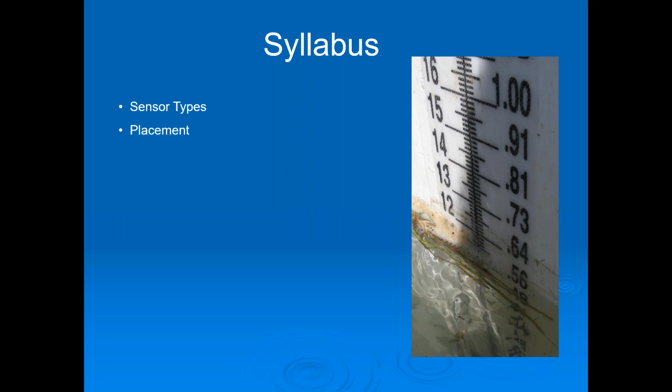Sensor types for collecting stage data, and placement. Really, that's it. It's going to be pretty simple. And we're going to just dive right in now to sensor types.

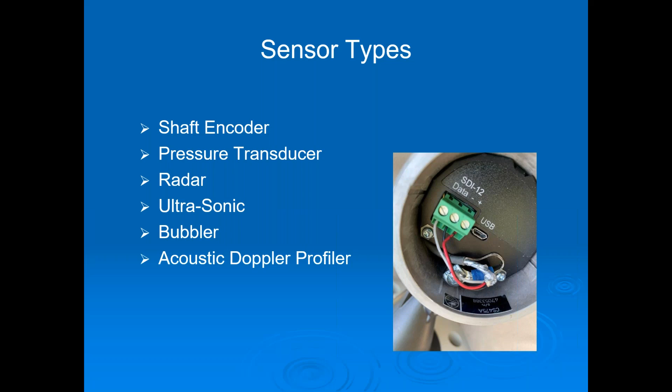We'll look at a few of the most common ones, including shaft encoders, pressure transducers, radar, ultrasonic bubblers, and acoustic Doppler profilers. I've got experience with some of these, but not all of them. So I'll admit where I have little experience, and I'll share the experiences I have with the more common types of sensors that are in use out there.

Shaft encoders are simple. We'll start there. These are the oldest type that we've used. In the old days, they weren't digital. They had chart recorders with pen and ink and a paper chart. Nowadays, they're digital. They're even SDI-12 type sensors. They're very simple in concept.

There's a shaft that's turned by a pulley here. When the float goes up, because the water level goes up, the weight pulls the chain down the other side. It turns the shaft. The shaft is connected basically to a magnet arm with a bunch of Zener diodes, sometimes the older ones. I don't know how the newer solid state ones are, maybe the same. And it lets you know that the position of the shaft has changed. So very simple digital type sensor.

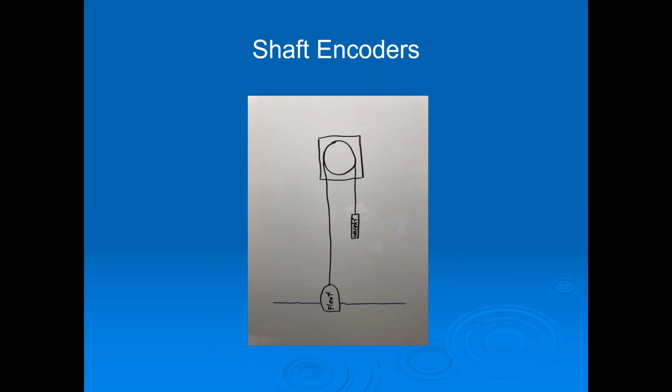So some advantages and disadvantages of shaft encoders. They're still handy. We use a few of them, not many, in all the sites that we take care of for our clients. They're considered a contact sensor, so something is in contact with the water to measure the water - that's the general category type of sensor. They're relatively inexpensive and sturdy. There's not a lot to go wrong on these. I think we've only broken one over many years, and it just quit. They're digital, obviously, and they do have SDI-12 options available now too.

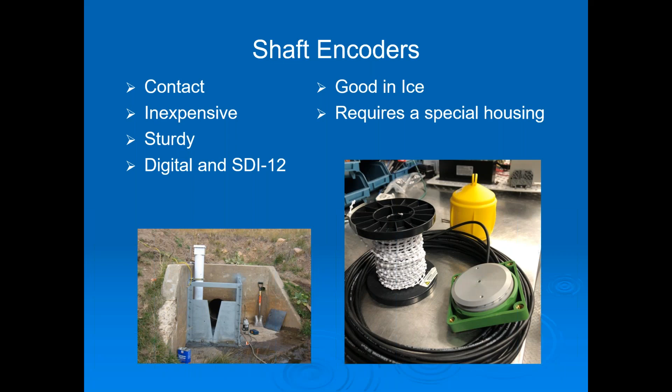Now, further on, I'll show lots of photos of just examples of one, but shaft encoder I won't really cover any more than this. So this is an example of a small site that uses a shaft encoder that still works really nice and reliably.

Pressure transducers are probably the most common sensors out there for flood warning types like us. There's two types of pressure transducers, the vented and the non-vented types. I remember using my first pressure transducer, maybe it was like 1990 or something, when they first came out. We thought they were amazing.

It was housed in a 4-inch piece of PVC pipe about 1 foot long, and is real bulky, and the signal conditioning was inside of it. So if you wanted to calibrate the span and zero pots, you had to take it apart. But we thought they were great, and they last like almost a year.

Nowadays, pressure transducers are quite sturdy. They last a long time. They're a good, relatively inexpensive option. And basically they do just what the name implies - they measure the pressure of the weight of the water on top of them.

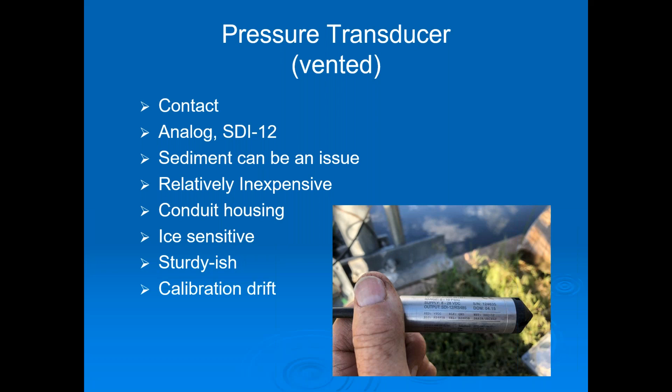So we'll come back to PTs later. There are non-vented PTs. The previous one was a vented PT, which is what we use because you can do telemetry. We have a client that likes to use these unvented PTs because they're just doing data collection. They don't care about flood warning. But I thought I'd include them anyway because you'll see them out there.

The big advantage is they're super simple to install. You don't have conduit running from a channel bottom up to your telemetry station up the hill or over on the side of a bridge or whatever. They just need a little short section of pipe bolted with a couple bolts into a rock or somehow hooked to a post or whatever.

They're a little more expensive than a vented pressure transducer. They have internal logging, internal power, so obviously you've got to do your maintenance on it, change the batteries out. You have to manually download the log, all that. Not helpful for flood warning, but good if you're just trying to inexpensively collect some data.

So won't spend much time on those. I don't care for them. You have to do post-processing too.

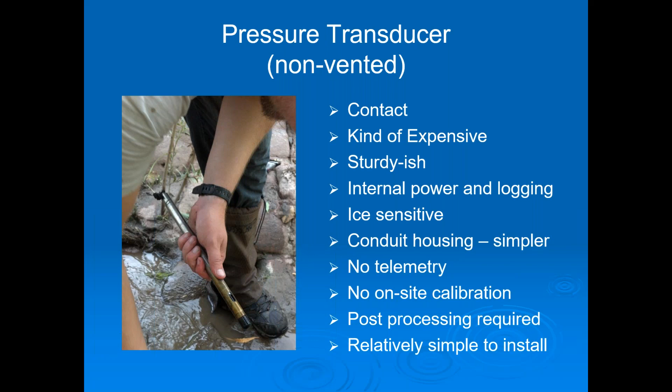You have a barometer nearby hung in a tree somewhere. After you take the log data off, you have to post-process to separate the atmospheric pressure changes from the water pressure changes. A vented pressure transducer is vented to the atmosphere, so it passively discounts any atmospheric pressure changes. So you're only measuring the depth, the weight of the water on top of it, and not the weight of the atmosphere on top of the water. Hopefully that makes some sense.

Radar, these are becoming more and more popular. We're using a lot more radar now. We really like the radars. They're really handy if you have an overhead place you can mount the sensor. The basic concept is they use the radar range of the radio spectrum, high frequency electromagnetic radiation, to measure from the unit down to the water, and it gets a return back, measuring the time it takes to travel down to the water and back. Because they're super high frequency, they're not thrown off much by temperature changes of the air and that kind of thing. That's the basic idea behind them.

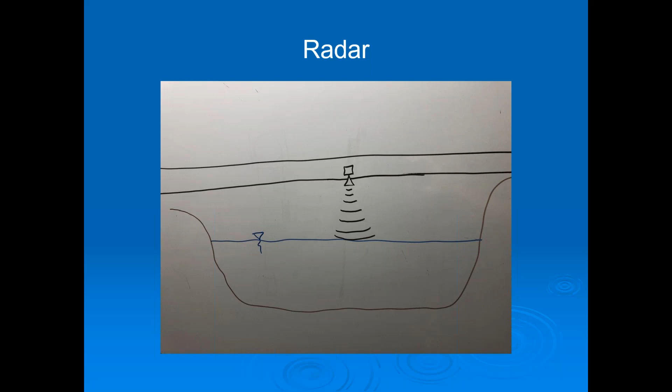So radars are non-contact sensors. They're about your best option out there for keeping a sensor out of the water, out of the mud, out of the environment that would harm it.

You know, there are older ones that are analog. We just use the SDI-12s now because they're easier to work with, and they're lower power than the analogs.

A nifty thing about the radars that a geomorphologist company like ours would appreciate is that it tracks channel invert between flow events. A flow event usually means the channel was dry, then a big flow comes through, and then it's dry again. So from dry to dry, we often have channel elevation changes, and the radar will pick that up. It'll let us know what the elevation was before the flow and after. So if we're seeing any trends in aggradation or degradation, that's a bonus bit of information we get with these non-contact type sensors.

So they are relatively more expensive than a pressure transducer, but they tend to be easier to install and maintain, so you save a little on your labor cost, depending on the layout of your site.

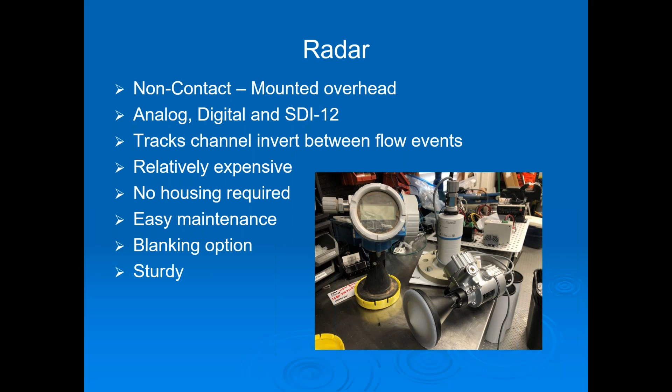They're sturdy too, but we do put them inside of housings, and I'll show you a couple examples later.

Ultrasonics - we thankfully don't use these anymore. Probably 15 years ago, they were a decent option for non-contact. The radars weren't quite out yet, they were in their infancy. The ultrasonics use sound waves to do the same job as a radar, to measure the time it takes to get down to the water and back, to measure your distance.

Because they are in the sound spectrum rather than the radio range, you can actually hear them chirp like a bat. They're real susceptible to temperature changes, and even with their internal temperature compensation, they had a hard time giving the feedback the sensor needed to tell how hot the air was, so it could adjust its algorithms for calculating the distance. Some of that is just the sensor in Arizona would get so hot, even in the shade, they just heat up. And so we didn't have great luck, and they died after 2 or 3 years anyway. So they just weren't robust.

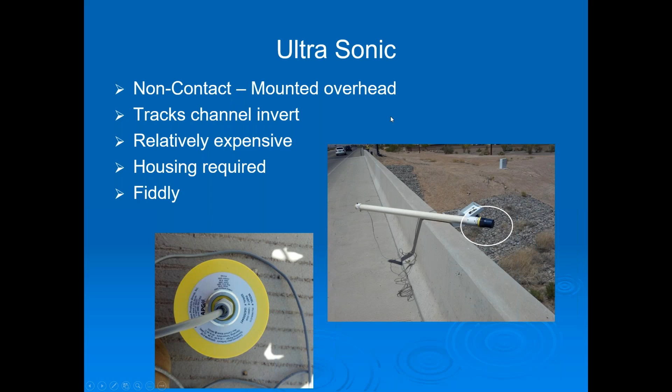So I call them kind of fiddly, and I wouldn't recommend them for flood warning, especially if you have a long distance to measure, like 30, 40, 50 feet. I think some agencies still use them in real precision measurements that are in a controlled environment, but they're not the greatest for us.

Moving on to bubblers. Bubblers are great. They've been around a while. They're very accurate.

The basic principle is, there's a gas or air source up in the housing where your gauge and equipment is. There's compressed gas, one way or another. It's forced out at a constant flow rate through a small tube, an orifice, down into the water. The deeper the water, the more pressure it takes to force the air out at the same flow rate. So as the water goes up, more pressure is needed to force that air bubble out. So they call them bubblers.

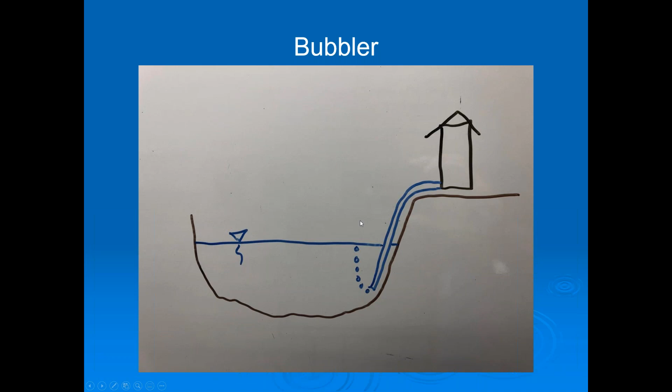Nowadays, they're more compact. They use less power. They can fit in smaller areas. They're still considered kind of bulky, but they have arrived, and they are useful now for flood warning. And they aren't just for the USGS doing high precision stuff - they're for us doing flood warning also.

I say it's mostly a non-contact sensor. All the stuff that matters, the expensive stuff, is up here out of the way, and it's out of the flood zone, hopefully. The only thing that's in the water is that very inexpensive pipe, or line, polyvinyl line of some kind.

They have everywhere from analog to SDI-12 options, and obviously SDI-12 is always the best alternative. They're more expensive, so that's kept a lot of our clients out of the market for them, along with their bulk, and they need a lot more power typically.

All that is improving though, so you should keep your eye on this and watch. Pima County's got one on a flood warning site, and they're having great results over the last few years. I think Lynn said they only had the line clog one time through kind of a fluke event, but basically these things keep the lines unclogged through a purging routine that you can time, have it do it every 5 minutes or something, where it supplies a higher rate of gas for a short burst through the line to just keep it cleared out.

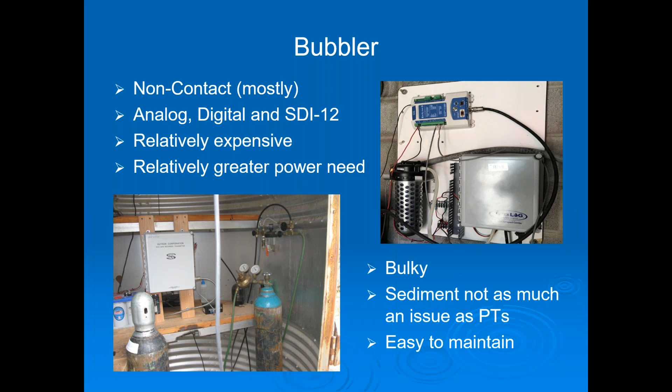So they're well thought through, they're becoming very reliable, and the cost is coming down too. So they're down in our range for sure, and they give you good, accurate results.

Acoustic - so we haven't used bubblers yet. Acoustic Doppler profilers, haven't used those either. They are one of those more expensive, more power hungry, bulkier options. I don't even have a nifty drawing for you - you guys are probably disappointed you didn't see my drawing.

The idea is that they profile the current, or the actual velocity. They can give you a velocity profile from the bottom of the channel or pipe up through the top. Instead of, like most stage gauges where we just get a depth and then apply theoretical calculations to determine velocity and discharge, these actually measure the velocity at different levels throughout the profile, and they also keep track of the channel geometry. There are some that look up from the bottom of the channel, and there are some that emanate the energy from the side of the channel and can measure very large bodies of moving water highly accurately, and even keep track of where the bottom of the channel is, say if it's subject to erosion during high flows or anything. So there's lateral and bottom mount options.

They can work underneath the ice just fine. They're really good for certain types of applications. For our typical flood warning stuff in dry, desert environments where the wash is dry most of the time, we still probably wouldn't look at an option like this. I'd look at it for maybe a big river or something where there's water in it all the time.

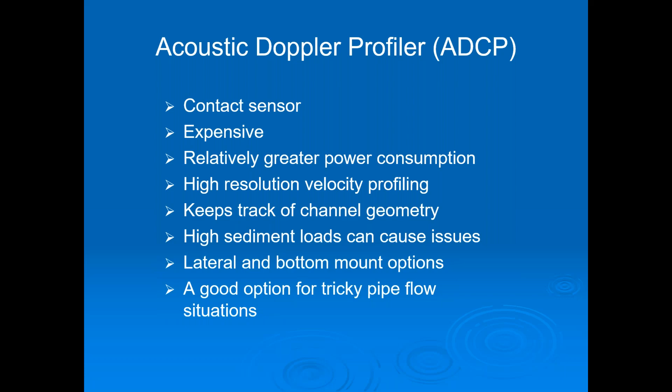So now we've covered most of the types of sensors that are out there that are in range of flood warning types like us. So we'll talk a little bit now about some open channel hydraulic concepts. I'm not going to have any equations here, just some ideas and concepts that we should keep in mind while we're looking for a place to put a sensor.

I'm assuming that you've already decided, hey, we need a sensor on this bridge or in this reach because this is really important to the community downstream. Or we've run a little bit of modeling, and this is where the model says would be the best place for us to put a sensor. That's where we start - I'm assuming you already have your place picked out. That would be a whole other talk, to talk about where to place the actual station.

Now we're just talking about, now that you've picked your site, where do you put your sensor? How do you decide what type of sensor, all that kind of thing. Then we'll just talk through some examples instead of everything we know about it - we'll just look at some photos. I like pictures, so pictures are fun.

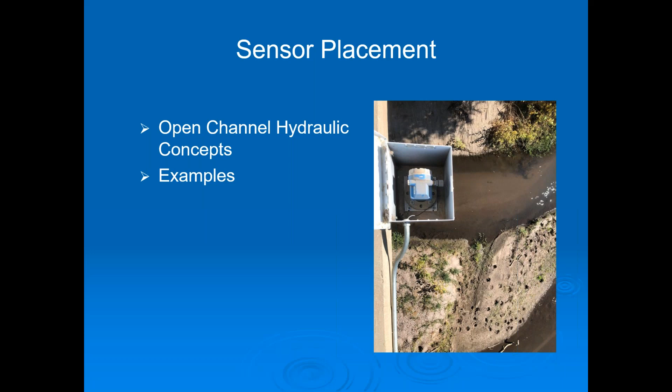Here's an open channel hydraulic consideration. The name of this talk is Collecting Stage Data. Stage is different than the depth of the water, by the way, and I wanted to make sure there's that clear distinction. In this little illustration here, another one of my great works, say this is a dam, or it could be a weir or any structure, and there's a ponded area in front of it.

We're looking crossways to it. Say on the left is an emergency spillway, and we've got our pressure transducer down here at some elevation. We don't even know what it is, but we've surveyed and we know that it is 5 feet below the brink of the emergency spillway.

In this example, this sensor, say it's a pressure transducer, is going to tell us that the depth of water over the sensor is probably around 6 feet. It's about 6 feet of water. That doesn't tell anybody anything really, because we don't really know where the PT is in relationship to the top of the dam and all that.

But with a simple survey, we do know. We know that this sensor is 5 feet below the brink of the emergency spillway. That brink is a really important thing in dam safety. That's what everybody's really concerned about, that and the top of the dam. Those are important elevations.

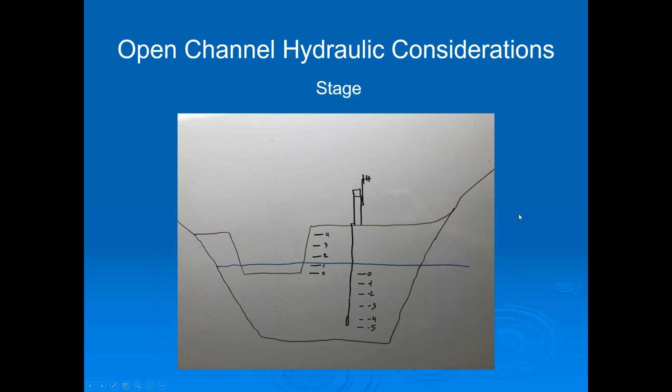But stage, there's stage for you. Stage is not depth necessarily. Hopefully that's clear, hopefully that's helpful. I had somebody ask about stage one time, and I was kind of like, how do I explain this? Didn't have a great drawing.

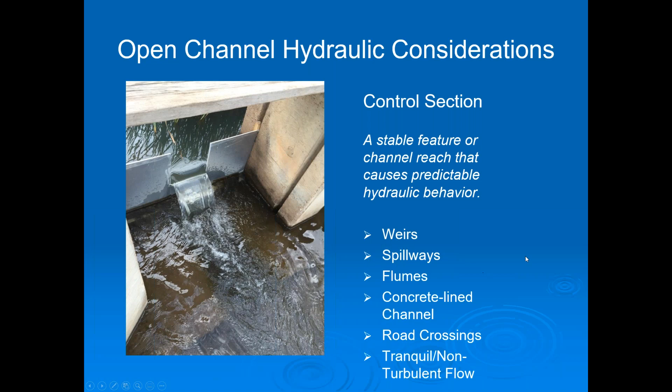Technically, it's where your forces of momentum are roughly balanced or less than the forces of gravity. That's as technical as we'll get, but you can all have a feel for that since you've been out in water. What's downstream controls things more than what's upstream of the sensor. Hopefully I didn't just totally confuse everybody with that - we can always circle back on that later.

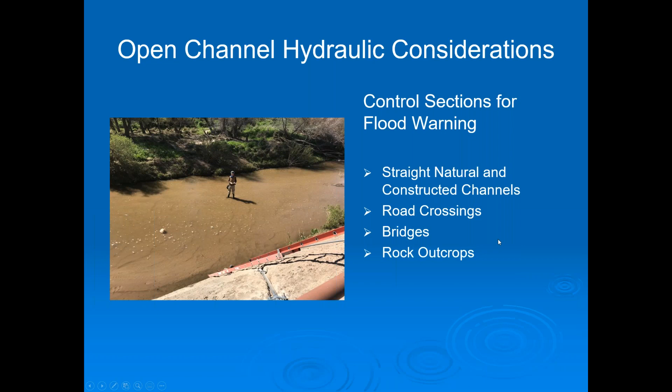We want it to be a stable structure that won't change shape while the flow rises. If the shape changes as the flow rises, we lose track of what the actual magnitude of flow is, and then we can't really warn downstream, hey, here's what's coming. We don't know because the channels change too much. So we look for things like rock outcrops, bridges, road crossings, that kind of thing for our control section for flood warning.

We remind ourselves all the time that this is for flood warning - we're not trying to measure every drop. If we were, we'd be using weirs and things like that, which aren't really useful in large channels. And weir equations don't go up very large anyway. They're not meant for that.

Speaking of bridges, bridges are great places to put gauges because they're accessible. Usually the channel necks down at the bridge because they've had to grade the bridge approaches in tight to minimize the length of the bridge. So you've got water squeezing through a point where you can put a radar, a bubbler, a pressure transducer, or whatever you have.

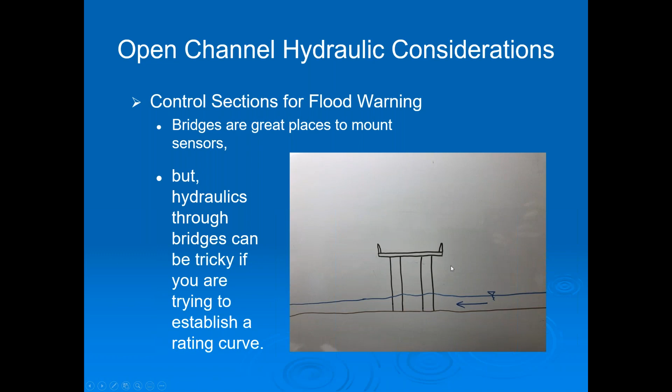But hydraulics through bridges can be tricky if you're trying to establish a rating curve. In flood warning, we're not trying to get a rating curve that's super accurate. We want to know, is it 100 CFS? Is it 500? Is it 10,000? Is it a million? We want to know a relative magnitude. So bridges are fine, but hydraulics are tricky through bridges anyway - you're not going to get super high accurate measurements at bridge locations, but they're great places to mount sensors.

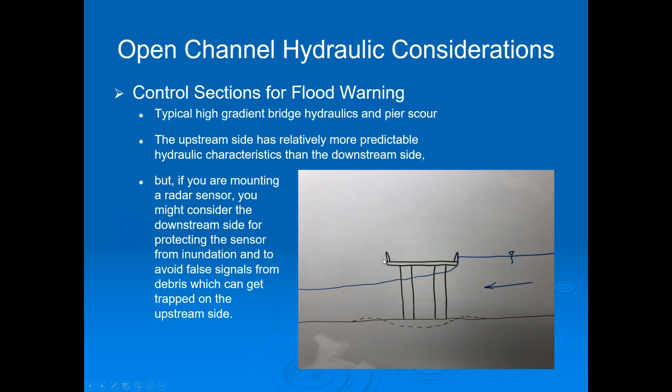You don't have as good a rating, but the sensor will survive, and that's kind of what we want. We want the sensor to survive the floods so we can warn people.

So this is just another thing to show what happens to the bed, how the bed deforms during these big flow events. That's another thing that's going to impact your rating curve.

I promise not to talk about rating curves too much, but that's a whole other talk. Rating curves are great. They help you transmit information to downstream people better, like actual magnitude and what it could do to them, as opposed to only knowing stage at a location. We've done that talk before, we can do it another time.

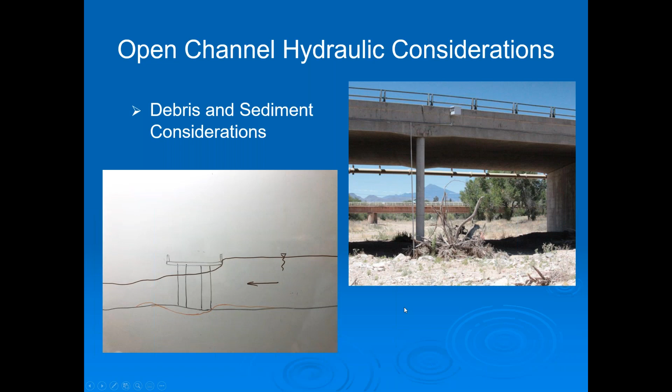We were trying to get the low flow channel, which was right up against the pier. We decided, let's play it safe, put it in the mid span. We're not on the very bottom of the channel, but we're close enough - this is flood warning, so let's not worry about it. So it just goes to show, you learn a lot over time, and you got to pay attention.

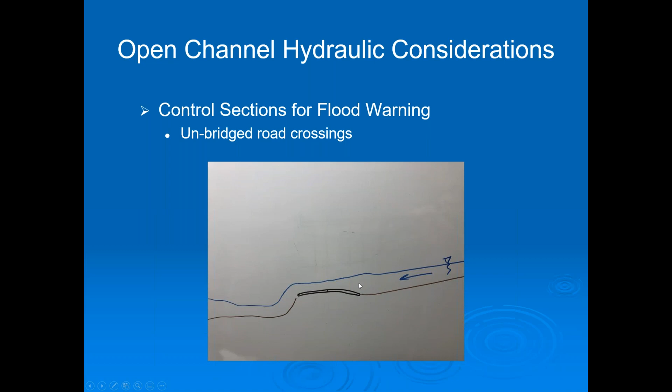So we're going to keep moving here. Some of the goals of sensor placement are, obviously, limiting damage to the sensor itself.

We actually put some equipment in it too after they abandoned it, used it for a couple of years until it blew out, and then we put something new in later. So you do what you can, but we do try to keep an eye on potential damage to the site so that it keeps running during the flood and helping give us good information.

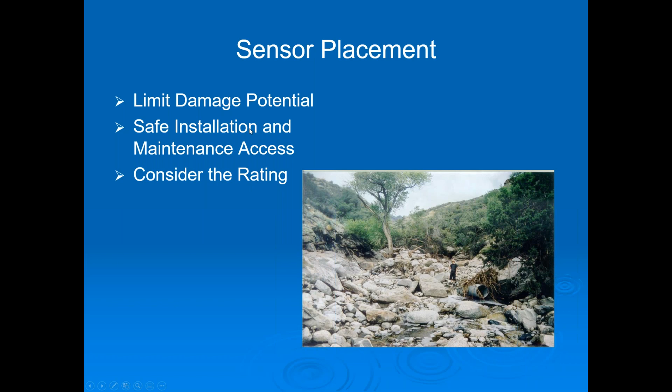The other thing we need to really pay close attention to, set aside the rating curves - we need a safe place to put that sensor so we can install and maintain it. We consider the rating curve after that. Mostly we need it to run right and give us good data.

So, sensor placement. Let's start with natural environments. Most of the stuff we do is in natural environments. Most of our clients are smaller rural communities that don't have any staff to do this, so we're out there in the hinterlands installing and maintaining these things.

We tend to avoid placing conduit in overbank areas where there's lots of sediment moving over time. Instead, we look for rock outcrops, obviously. A lot of this goes without saying - it's probably rudimentary for some of you, but I figured we need to at least cover the rudimentary stuff too, and we'll hopefully have some better tips later.

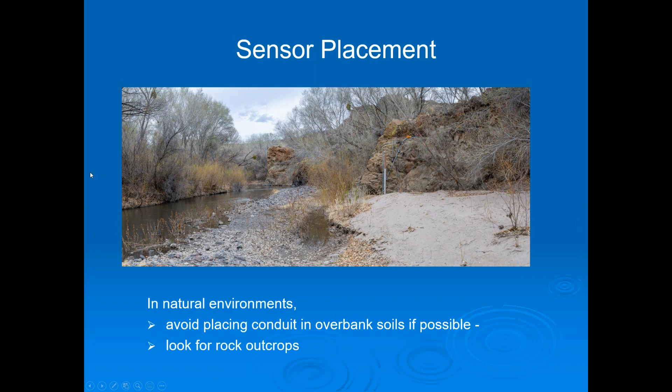So we look for rock outcrops. This is also a place that squeezes the water over. It's a pretty stable channel situation because of the outcrop, and the channel isn't going to move laterally on us because this is actually a fairly big, deep canyon, and there's rock outcrops on the other side. So we've got a nice pinch point to put things.

For pressure transducers and bubbler lines in high energy environments, we've learned the art of armoring things well. We tend to use, down in the low flow channel areas, 1.5 inch IMC - that's intermediate metal conduit or rigid conduit, as some of you might know it. We use that a lot and nail it down really good, because you can see from the size of the cobbles in this stream that this is a high energy environment. This isn't a nice sandy bed environment with low flows, low velocities under 10 feet per second.

This is 20, 30 feet per second, moving big cobbles all the time. So we've learned in most of the rough areas we work, to really armor these things well. We use galvanized tower clamps - the same clamps you use to put antennas on towers and to mount standoffs. These are excellent for mounting conduit to rock and concrete. Highly recommend it. Don't use the thin straps you get at Home Depot - those just won't do, and they rust really bad too.

And we use 3/8 or 1/2 inch concrete anchors, and we've got a few hammer drills, so invest in a good hammer drill - it's worth it. We never use flex conduit. Yeah, it's easy and everything, but you'll kill yourself trying to maintain it in the future. It'll blow out on you, and it's hard to push cable through flex, so we just don't use it. It's not strong enough for what we do.

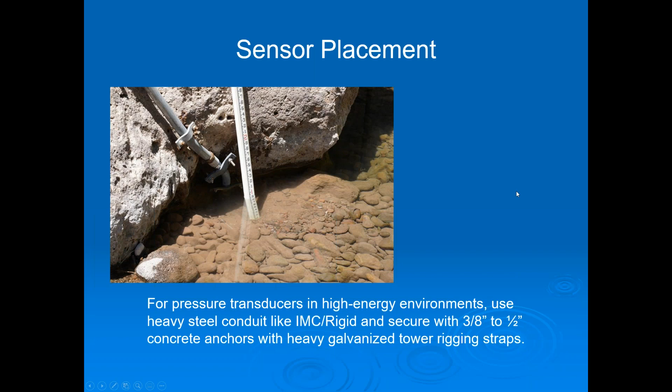Here's a couple more examples of typical installations. This is a cliff in the Gila River. We put conduit bodies all over the place for access. The rule of thumb is if you can't pull a cable through 2 90s in a row - if you've got a 90 sweep or bend, you're gonna have to put a conduit body in before you get to the next 90, or you're gonna really struggle over the years if you ever have to change out a pressure transducer.

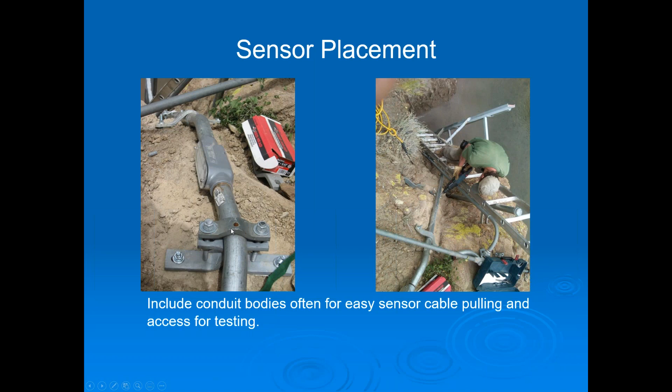This is about a 150-foot run, way up about 50 feet up a cliff, and it's a difficult site. We spent days putting this all in, but recently Tyler and I had to replace the PT, and it didn't take us more than an hour because we had conduit bodies all over the place to aid in that. So don't spare the conduit bodies, and use really big anchors and heavy stuff. This has been in for years now, and there's no rust or anything on it. It does just fine.

Just a little note, I was pulling in a lot of random notes and things, but tips and tricks from the years.

If you're working on a structural steel bridge, you shouldn't drill into the structural steel. That's a no-no, not because it introduces a weak spot as much as rust. Rust is the bad guy with structural steel, so we never drill into them. We're always permitted to be in these places anyway, and they would always rather not have us drill.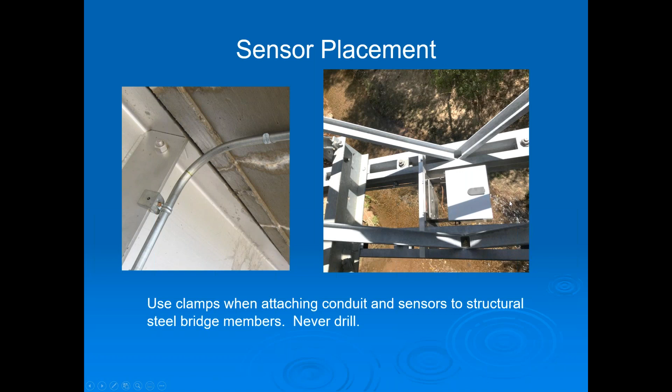So we use clamps. There's all sorts of clamps you can use for attaching conduit to the steel. This one is a radar box, a radar housing. The radar is inside this little box. We mounted it to a big plate, which was bolted to angle that we brought, and then we used big all-threads that went clear through. We made basically a huge clamp that clamps through the bridge members rather than drilling into the bridge. This is also nice because we can move it easily—we've already moved this one once when the channel shifted. This is on Aravaipa Creek in central Arizona. So never drill into the structural steel.

Here's another thing we like to do in placing sensors. Here's a pressure transducer, you see it down here in the junction box. This is a standard alert standpipe up on a dam in Arizona. The conduit is probably 150 feet in this case, and it goes way down into a lake. It doesn't go real steep, so you couldn't just let the weight of the pressure transducer feed itself down—it's not steep enough.

So what we've devised and used for over 10 years now at our lake sites in Arizona is simple: put a bolt through the very end of the conduit at the deepest part of the lake with a copper bushing—just copper pipe. We loop monofilament weed whacker line through that bushing, around it, and it's taped to the PT on one side and comes out the other. So it's like a pulley for pulling that PT down to the bottom to make sure it gets locked hard against that bottom bolt.

We don't have caps or anything on the bottom—we'd rather have sediment able to move in and out easily and not get trapped in there. So a bolt through the end of the pipe, it's not glamorous, but it works really well, whether you're in an open channel environment or down at the bottom of a lake.

And this monofilament just lasts forever—we have to retape it every couple of years. It's a simple, non-technical way to do something, and it's cheap too.

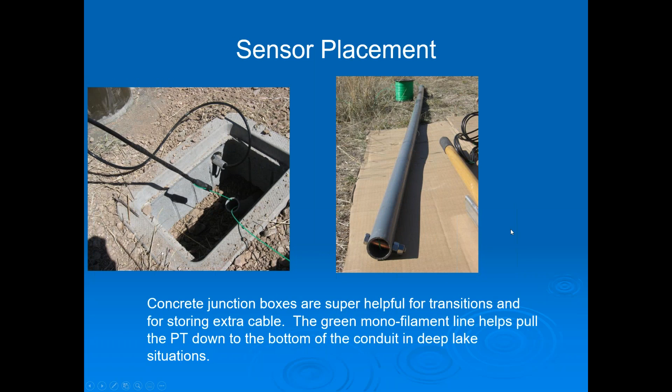A little tip: wherever conduit is buried against the soil, we always wrap it, or it'll rust pretty quick, even in Arizona. Here's an example of grounding—this is another radar sensor housing, getting ready to put the radar in there, and we always ground everything because lightning's a big thing in Arizona, as it is everywhere. We usually ground the conduit, and sometimes run ground all along the conduit if it's not all connected well. This conduit doesn't have any expanders on it like for bridge expansion, so it's complete and we can get a good ground from there back to where the conduit hits the soil. And over on this side, we'd put a ground rod and ground it all too.

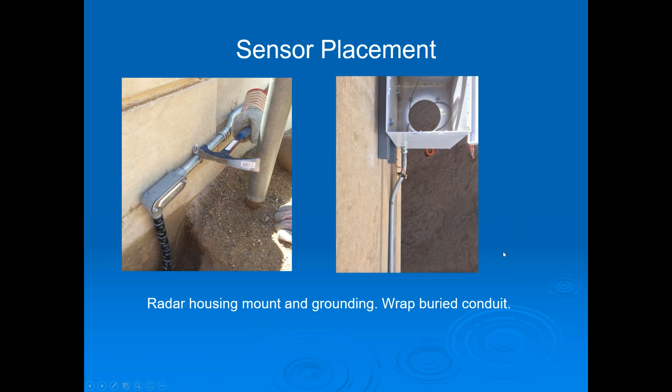This is just to throw out quickly—a typical newer design that we really like. We've done a lot of these using the High Sierra traffic cabinet. It's a real simple one or two day type install design. This particular one's on a wing wall entry to a culvert. You can see it's got a pressure transducer conduit coming down. Very simple to install, very sturdy. In an urban-y environment with homes and stuff, this kind of structure looks at home. We do use round standpipes sometimes still on new installations, but usually where we want a softer look—out in the forest or somewhere we don't want to attract attention with a traffic cabinet with all its angles and shininess.

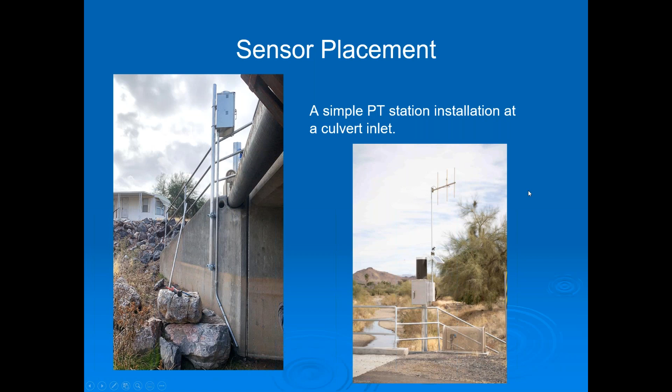So just to show an example of how you can do stream gauges real simple—got another one here. Again, I mentioned the bolts on the bottom of the pipes; that works way better than what we used to use, just caps on the ends. But in Arizona, we have so much sediment and flotsam in the water that it just packs up and makes the PT not work so good. Another thing here on this right photo, flow is from right to left—this is one of our large rivers in Arizona.

We always try to angle the PT down and away, or in the direction of flow, so it doesn't catch so much debris. Debris will glance off of it rather than get packed and caught up in it. So that's just another consideration for sensor placement.

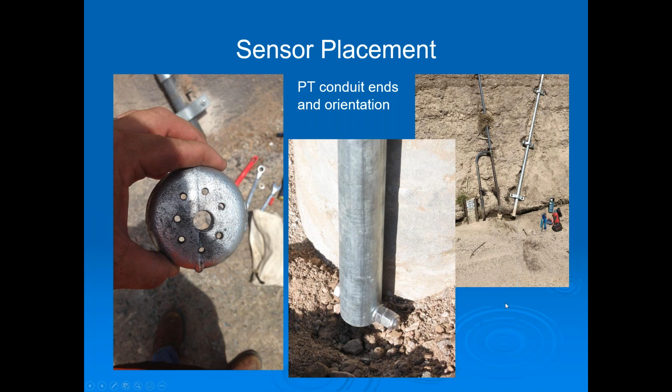How you run the conduit is everything. This is next to a USGS site. They just went straight down and they catch a lot of stuff. There's always trash and junk stuck on theirs. Ours seems to deflect it pretty well. Plus we set it in, we jackhammered and chiseled out a channel for it so it stays flush and doesn't get the big stuff.

This is kind of our Econo, we call it our Econo radar sensor station. It's a one-day install. You bolt it onto the bridge, it's pretty cool. Here you see the whole site where the radar is looking out the bottom of the High Sierra traffic cabinet, just looking straight down at the ground.

It's nice that we don't have a river flowing, so we could actually climb up from below. It's just two pieces of angle bolted to the bridge and bolted to the box. It's real simple to level everything up with this kind of simple design. And then you can see here inside the cabinet, there's our battery, there's our radar sensor mounted to the bottom, looking out the bottom. We really like these.

They're economical, quick to deploy. You can move it if the channel moves, you can move it if you want. But if this is all you have, you're looking at just a wide natural channel out in the middle of nowhere, what do you got?

Well, our client really wanted a stream gauge here, and there was nothing for miles, no rock outcrops, nothing. We have a tree. So just this last year, we attached our first one to a tree ever. I wouldn't highly recommend attaching to trees, but it was all we had.

We had to trench across a lot of overbank with loose alluvium that could be eroded during a big flow, because this is all in the floodplain here. This would all be inundated. We put the box up as high as we thought we should to avoid flooding. But the conduit's gonna be tricky.

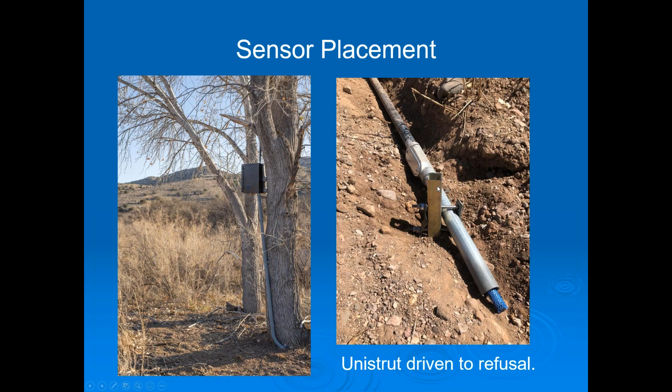So we've done this in other places where we just drive unistrut to refusal. We put a trench in, drive unistrut to refusal, and then use heavy clamps to attach our conduit with the PT in it to the unistrut. We've also used unistrut clamps too, and they work pretty well, but the heavier clamps just make us feel better. Unistrut's great. We've had several sites using it for years, and it stays put pretty well in high erosive environments.

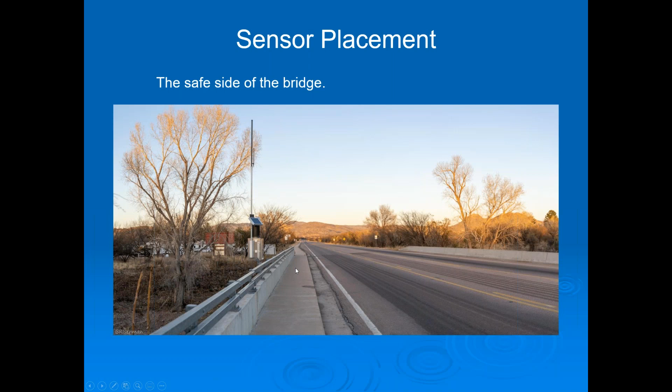So one last couple slides on safety. Again, this is a site where flow comes from the right side of the frame to the left. We would have maybe liked to put it on the upstream side for better rating, but it's flood warning, we don't care. We had safer access with the sidewalk on the downstream side, so we like to be able to stay safe while we're doing our work. That's a big important factor. Don't overlook safety when you're putting these things in, because you want them to be there for years. You want to be able to maintain them for years, and you don't want people getting hurt.

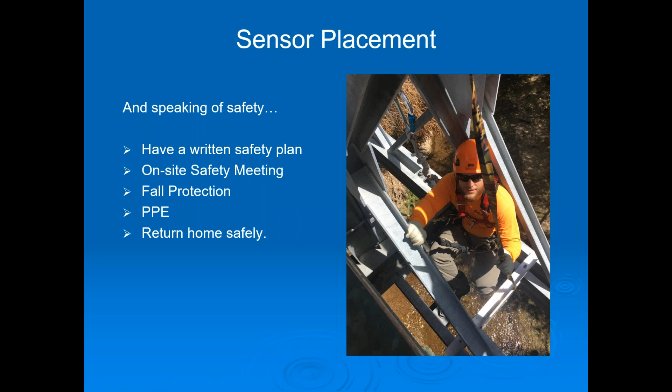Speaking of safety, one more thing from yours truly, the safety officer here at J.E. Fuller. Always have a written safety plan. Have an on-site safety meeting and document it. You have to document your safety and the meetings you have. Everybody should have fall protection where there's a risk of falling more than 6 feet, and have your personal protective equipment on: hard hats, sunglasses, glasses, and gloves. Make sure those things are on hand and that your people use them so that we can all return home safely and be ready for the next big flood. That's my little plug about safety. I like to add that in because we've had our share of accidents.

So I'll open it up to questions. Brad, do we have some? We do have a couple.

I'll start with the first question from David Murdoch. He's asking if you need a special setup for the radar sensor in order to read invert or channel bed, and how do you know you're getting valid data from the surface that's not water? That's a great question.

First off, in your setup, you reference it to the channel bottom if you can. If you can measure down there, you tell it in the setup on site, hey, zero, the bottom of the channel is this, and then it measures everything up. It'll give you stage, so it's smart enough to give you stage.

If you're looking at the data and you're seeing a lot of weird bouncing happening in several feet, it's having a hard time finding the water. We had one recently, the last one I showed in the safety photo. In that case, we set it up, it seemed to be working great. It started bouncing between 4 and 0 feet, over and over, and it was driving us crazy.